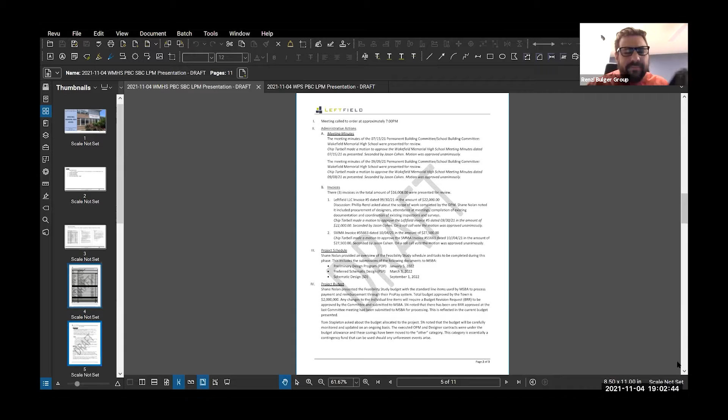I'll second. Any discussion? Who was the second, Michelle? It was Tim. Thanks, Tim. Any discussion? Hearing none, is there any objections to the minutes? All in favor? Minutes are approved unanimously. Thank you.

Second item is the schedule. Since the last time we met, we have reviewed the schedule and pushed it out a little bit. There was some concern about the PDP submitting it right after the holidays. It was January 5th was the day we were looking at. Given where we are with the visioning, the surveys and inspections in the existing building, and coming up to the holidays, Thanksgiving and Christmas, we were a little bit concerned about rushing the review of the different options.

Getting those out publicly and presenting them to the building committee. So we're looking to push the submission of the PDP about a month to January 27th. That will give us time to have a couple more public forums and also a couple more building committee meetings before we actually have to submit that to MSBA, end of January, early February. That will push the PSR.

I mentioned at the last meeting, the MSBA meets every other month, 6 times a year. So pushing that schedule out a month for PDP pushes out that whole cycle. We're now proposing to do the PSR early May and go to the MSBA Board of Directors meeting in June of 2022, pending approval of our preferred solution.

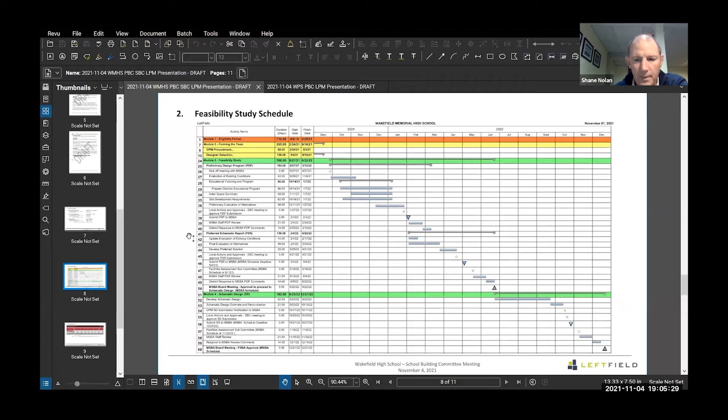So we've pushed the schedule out. I've attached the more detailed schedule here, which outlines the tasks during the different submissions to MSBA. But that's where we are right now.

Shane, do you need a vote on changing that schedule? I don't think we need a vote, Joe. I'll just notify MSBA — we have to submit a monthly report by the 12th of the month, every month. So I'll just notify them that we've pushed the cycle out from the October 22 board meeting for approval to the December meeting. Joe, if there's no objection, I think it would be good to take a vote, because sometimes MSBA asks if the SBC has voted on it.

Okay, so can I hear a motion to amend the schedule? Move to approve the revised schedule as presented. Is there a second? I'll second it. That was you, Tom, right? It's Mark. Mark, sorry. My first second. Yeah, there you go, I knew you'd make it, Mark.

All right, let's do a roll call. Janine, yes. Tim, yes. Phil, yes. I don't know, Chip, are you on yet? I didn't think so. John, yes. Tom, yes. Mark, yes. Did I miss anyone? Okay, it's unanimous. Thank you.

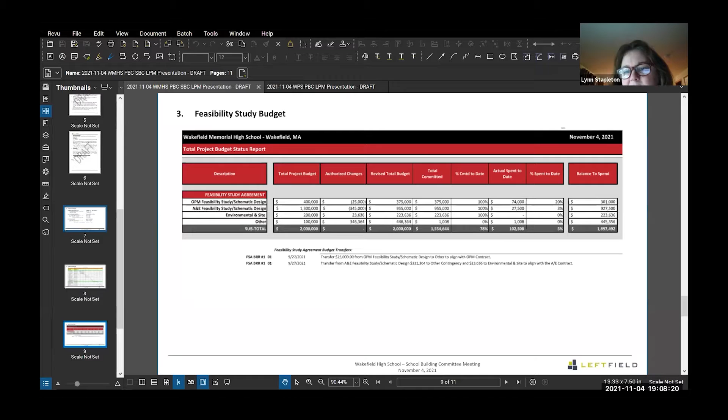At the time of the town meeting, we will have already submitted the schematic design and will already have had a budget established. At that point, we would probably also have met with MSBA to review that and be confident that going into the MSBA Board of Directors meeting, they would be satisfied with the budget we would be presenting. So theoretically, you could vote this at town meeting in November or by a special election in January, maybe.

Yeah, obviously something I think we should have some more discussion about, just to understand the implications of all of that and the timing for folks to be able to review the schematic design before we vote on it. Yep, absolutely. Thank you.

Any other discussion? Any other questions on the schedule?

Just an updated budget. There's been no changes to the budget since we last presented it. I've just updated it for the invoices that were approved last month. They show here in the actual spent to date column. We didn't submit a ProPay to MSBA last month, we were under 50,000, so we will after the next building committee and before the end of November, we'll submit another one. But there's been no changes to the budget line items, I've just updated it to show the invoices that have been approved.

Any questions on that?

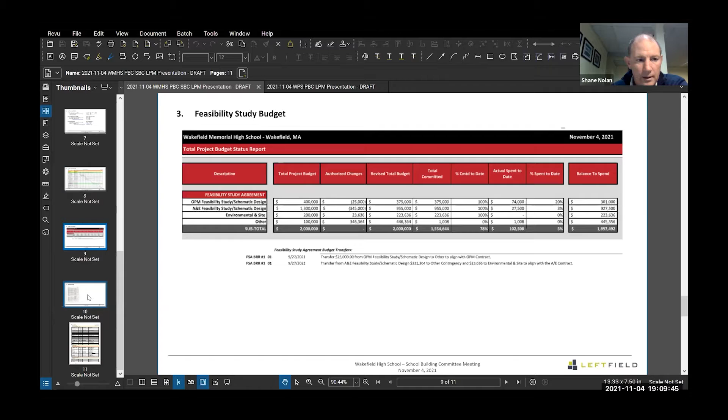And then just the next item. So we've been trying to tie some of the public meetings in with that schedule and the revisions. This is just an outline of the upcoming meetings during the PDP and the PSR, so people can put them on their calendars. We will confirm these as we get closer to the dates for the individual meetings. But this is what we're looking at for the PDP and the PSR.

So over the next month, we're here tonight for the building committee. We have a public forum next week where we're going to discuss the educational visioning. We've had 2 educational visioning meetings so far, we have 2 to go, so we'll update the public on the progress of those. Also going to talk a little bit about the existing conditions report, which we're going to talk about in a moment here tonight. We have our 3rd workshop, November 16th.

Next building committee meeting will be November 18th. And then the final educational visioning workshop will be November 30th. And we'll then update the public on that after that.

We have gotten a number of you who have submitted requests to be on the various focus groups. We're just going through that with the school administration, and we'll be finalizing those in the next week or so. So we'll notify people of which groups they're on if they've submitted requests to be on those groups.

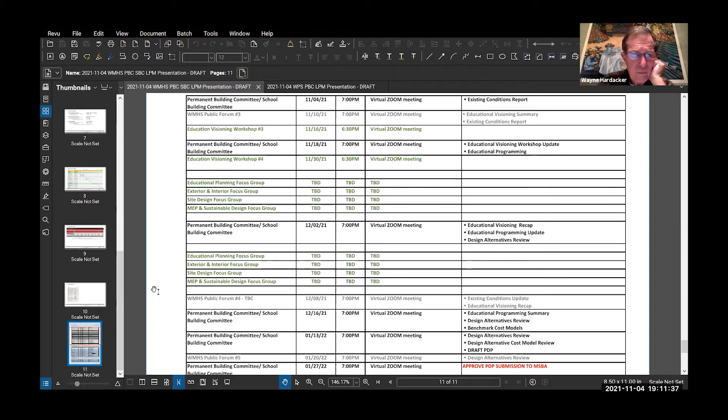Shane, it's Phil. Could you send this out as its own document, this spreadsheet with all these things on it? I will, yeah. It's updated regularly, Phil, but certainly I'll send it out. We'll confirm on the website, I put all these meetings on the website that we know, but certainly I can send this out to the group.

Any other questions? This is John. At the project Facebook page, some of these events aren't on there yet. I was just wondering if those will be updated on there. Is that kept up to date in line with the website as well?

Yeah, I'll have to coordinate that, John. I don't do the Facebook, I do the websites. Well, I'll make sure those are coordinated. But I would use the website as the kind of determining place to go.

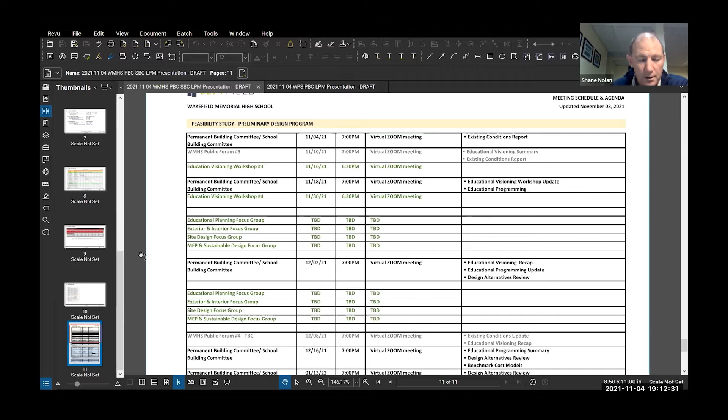The Wakefield Memorial High School Building Project Facebook page has the 4 educational visioning sessions included on there. And it also has the public forum noted on there as well.

Okay, yeah, I saw the November 10th one, I just didn't see anything after that. Right, I think what's happening is the town's website is also posting, the Facebook page is also posting, and that one, because they have more followers and whatnot, is getting the first one you see. But if you type in the Wakefield Memorial High School Building Project Facebook, it'll come up. Okay, gotcha, I'll take a look. Thanks.

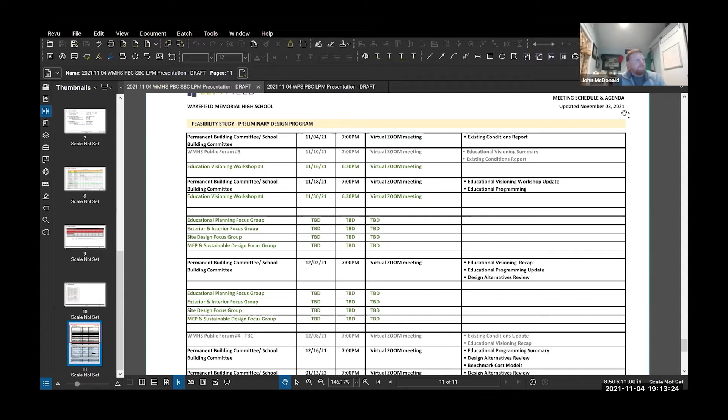Any other questions on the meeting schedule and agenda?

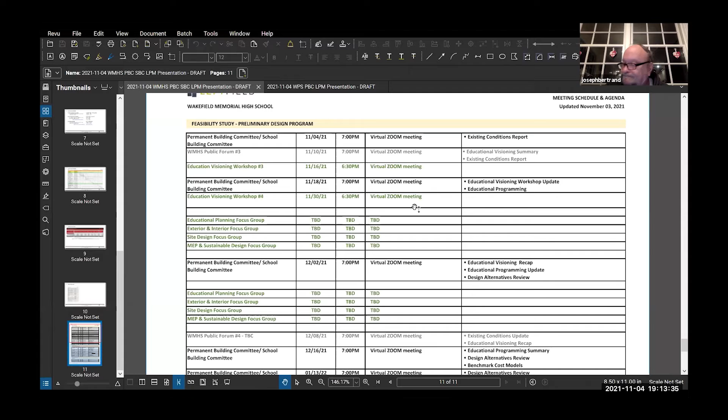All right, and that's all I had tonight. All right, Lorraine or Helen, who?

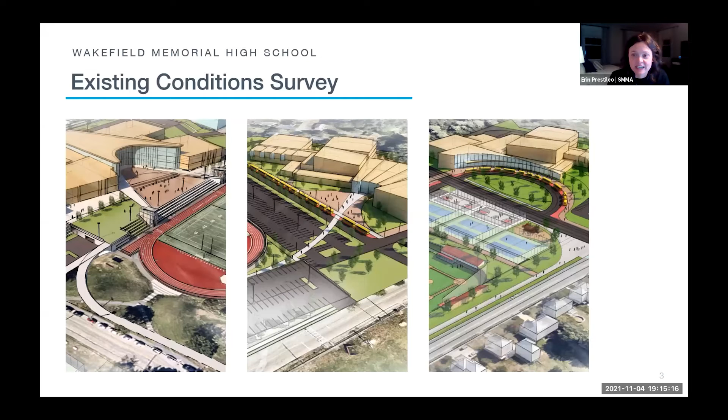Okay, so we'll start with site. The thing about site is that many of these things you are aware of because they're things that you can see, unlike things that are behind walls and below ground.

So the big takeaway here is that, first and foremost, the fields are in obviously great shape. They are very well maintained, so that is definitely a positive.

The condition of the one internal courtyard is fair. It's also the only space you have for outdoor learning, and we observed that because of that, there were actually some students and classes on the Beasley Oval. There's also an overall lack of pedestrian circulation.

So if you're in the building and trying to get to these great field spaces, you'll have to walk through parking lots, and that's something we're going to want to get into once we start to develop the site piece of all these different options.

We observed 4 school buses, but kind of an overall lack of on-site parking. The parking seemed inadequate, and again, that's something we want to be aware of as we move forward with designs. The loading dock was also inadequate and in poor condition.

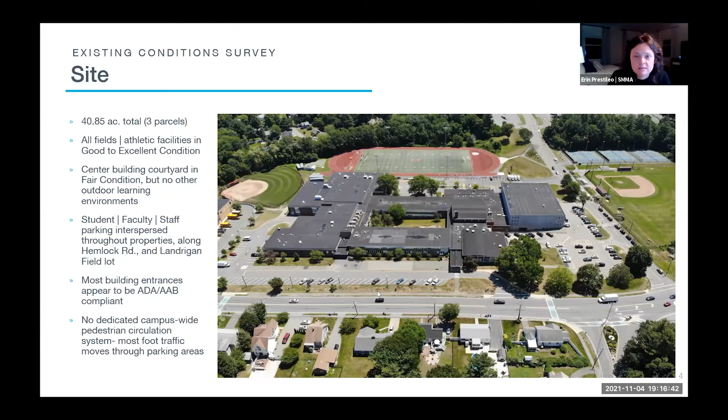I'm sorry, Matt, we have some photos of these on the next slide that show some of these. Again, these are all things that you see, so you may be well aware of some of these items.

If you go to the next slide, I just wanted to speak briefly about some of our work with our consultants. Our site survey will begin field work next week. Geo-environmental, traffic, and wetlands studies are all underway.

We did complete 17 geoprobes last week, completed between 1 and 15 feet. They identified different types of soil material: topsoil, sand, some buried organics, and fill. About half of them hit rock, and we don't know if that's bedrock or a cobble or a boulder, but that's what we have so far.

And that's it for site.

So I'm Ben Williams. I'm speaking for our structural engineer on the project, Paul Levinoy, tonight, as he wasn't able to join us. In terms of the structure, he observed during his walkthroughs that the structural systems throughout the school are broken up into mainly 2 different categories, or 2 different vintages rather.

Exterior wall systems consist of composite masonry walls, face brick masonry back or CMU backup, all grouted solid. Generally, those also have a very low ability to maintain heat inside the building. Typical buildings are significantly much higher. We are suggesting that we've looked at this and think it's about an R4. Typical buildings nowadays can be between probably about R25 to R30 or even higher, depending on the sustainable goals.

There are few exterior expansion joints throughout the building, which lends itself towards movement and cracks, especially at the corners, especially where the 1970s and 60s buildings meet. Throughout, it's common to see sealant joints failing, where you have brick meeting windows, sills at windows, things like that. At louvers, consistently also showing sealant failures.

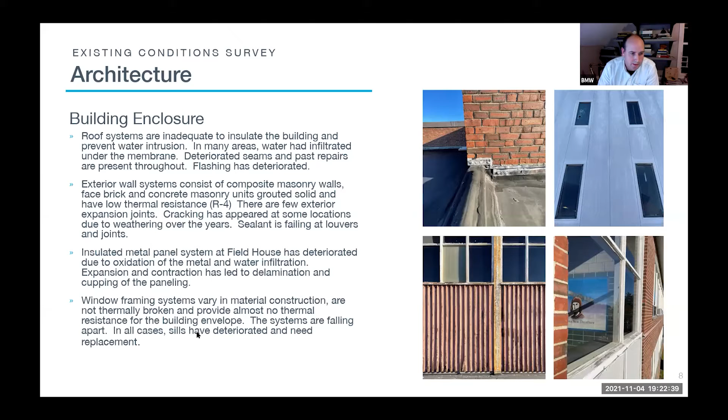At the field house, we've seen 2-inch insulated metal panel systems. The panel systems themselves had a coating over time that has deteriorated, oxidized the metal, starting to expand and contract and delaminate those panels in their ability to keep out water and also maintain temperature in that space. Window framing varies in material construction. None of them are thermally broken. They all have single pane glass and again show signs of sills deteriorating.

Safety and egress is something we've been paying attention to. Classrooms and corridors aren't adequately separated with fire rated walls. Spaces responsible for discharging people safely are allowing for the transfer of fire and smoke and not providing enough compartmentalization. Doors are held open with wedges, whereas they probably want to be connected to a fire alarm system through a system of magnetic hold-opens that would close in the case of a fire.

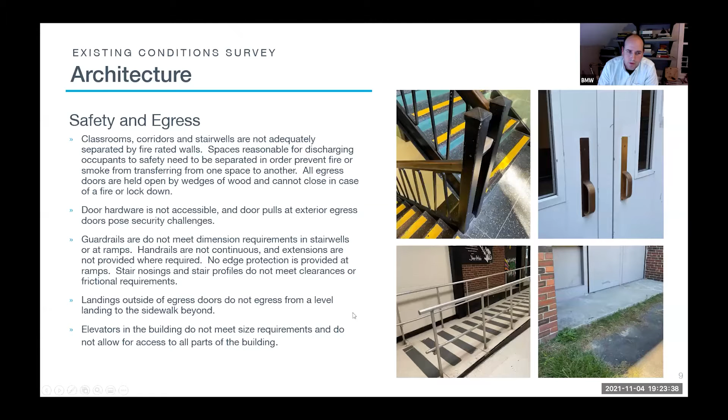Door hardware throughout is not accessible. Door pulls at exterior egress doors create some security challenges in general. Stairs, guardrails, and handrails don't necessarily meet dimensional expectations and so forth. Landings and elevators all need to be looked at a little bit further.

General education spaces are composed of masonry partitions, spline ceilings, and flooring made of hazardous material. The 1970s building features similar construction - masonry, ceiling tiles, and hard flooring. A lot of the spaces were designed to be open, but had later been partitioned off, creating spaces that are poor acoustically. Likewise, spaces that had operable partitions are not being used as they were originally intended.

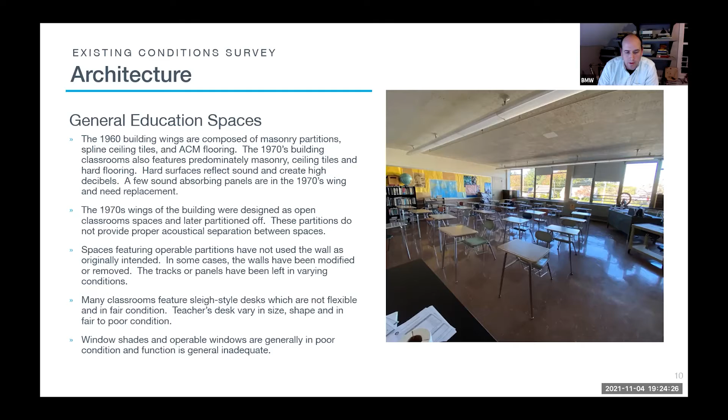Furniture doesn't quite meet the goals of modern learning, and window shades and operable windows are not functional. Bathrooms, locker rooms, and so forth are falling short in that the toilet fixtures and accessories inside aren't within accessible reach and don't necessarily meet the space requirements needed to access those fixtures. Locker rooms in the field house are also generally in poor condition, as is true for the showers.

Guess that hands it over to me.

Many of the things you probably know about already, but the building consists of two independent secondary services: one from the original 1960s, and one from the 1970s. Both are original to the building, which is very common in this kind of construction.

All the equipment is what we call Federal Pacific, a manufacturer very common around that time, but no longer in business. You just can't find parts, circuit breakers, things like that. So it's operating, but it's really not operable for the long term.

Similarly, there are two generator systems for the buildings, again from the 1960s and 1970s. Both generators are operating, but the systems are non-compliant to today's standards in that you have to separate emergency, legally required, and optional standby systems. Aside from the head end generator being old, the distribution from that generator system is non-compliant either. You would have to have separate transfer switches for emergency, separate for optional standby, which is like kitchen equipment, versus emergency lighting.

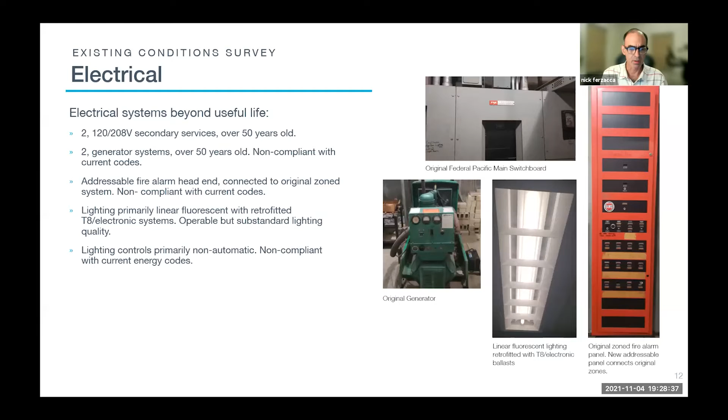There's a whole series of auxiliary systems - public address, master clocks, and so forth - which are all original to the building. I didn't write about those as well, but the summary is really that most of these electrical systems are pretty original to the building.

And yeah. Thank you, Nick.

And again, my name is Matt Rice. I am an architect, but I'm going to run through the HVAC systems and the plumbing systems for our engineers that walked through and did the survey.

The short story here, obviously, is that most of the HVAC equipment has exceeded its life expectancy. That's to be expected from a 1960 and 1972 construction, given the equipment we're dealing with. This includes the boilers, boiler room, including the steam and hot water distribution piping in many of the crawl spaces that exist. There's a series of underground tanks for fuel oil located just outside the loading area, something to be investigated and dealt with on the site side of things.

Many of the chillers fall into that category of having outlived their useful life. We know there is a very new chiller that was put in recently for the cafeteria, and while it's in good condition, it's still sort of the minority in terms of the overall equipment within the building.

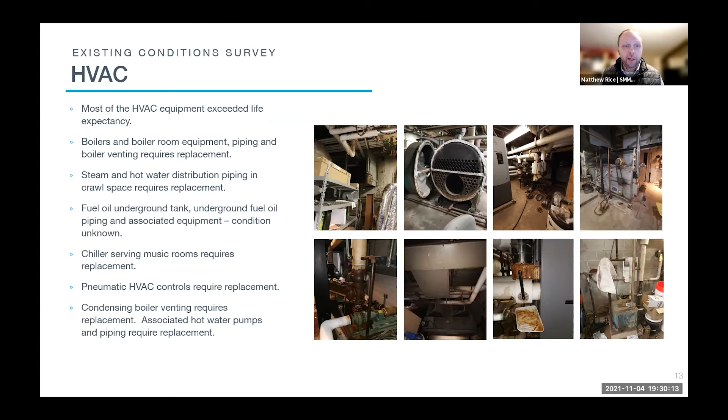There's older pneumatic HVAC controls that are just outdated at this point. As well, the condensing boilers, which are newer in terms of boiler equipment, their venting has already started to rust and deteriorate a bit. So that would need to be replaced, as well as the hot water pumps and piping associated with that. Again, the chillers I mentioned - their operation would need to be verified in terms of making sure they're achieving what they are designed for.

Their pumps on the cold water side and chilled water side need replacement. Unit ventilators that provide ventilation to the classroom spaces and primary learning environments, and their piping, require replacement. Fin tube radiation, cabinet unit heaters, the air systems, ductwork, and associated components serving cafeterias all require replacement, as does rooftop equipment in that same category, as well as the roof exhaust fans.

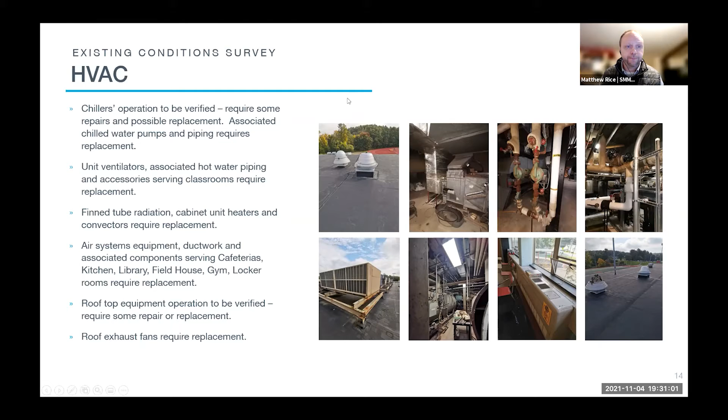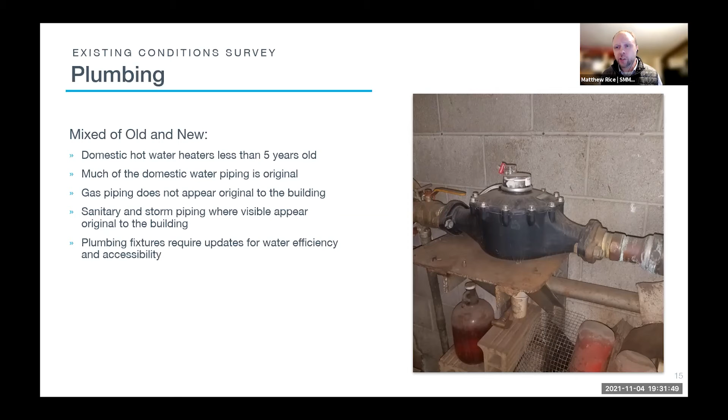On the plumbing side, a very similar story. Most of the system and distribution is of original vintage, and so, as expected, has outlived its useful life. The exception would be the domestic water heaters, which are less than 5 years old, but the piping feeding those heaters is original. Gas piping, some of which was installed to feed one of those generators that was converted from oil to gas at a certain point, and the sanitary and storm piping are also original at this point. And as Ben noted, the plumbing fixtures, both in terms of water efficiency and accessibility, are in need of replacement.

And lastly, the fire protection system, installed in 1975, is of good vintage at this point, close to 50 years old. There are 3 different fire water services coming into the building, so that's something we'd look to make more efficient and centralized as part of any renovation project, even bringing it up to code. A new sprinkler system that is fully code compliant would be required in any scenario.

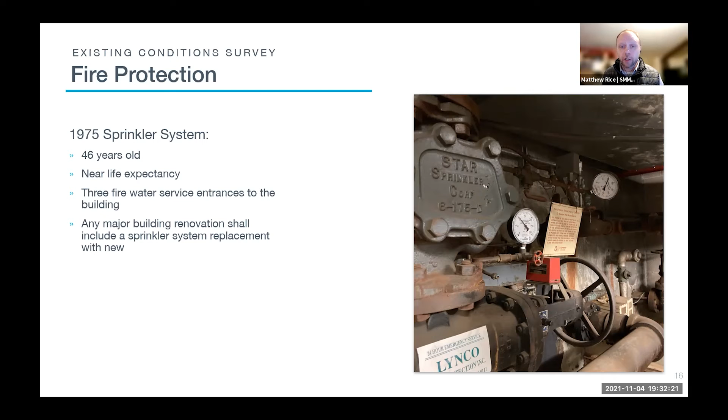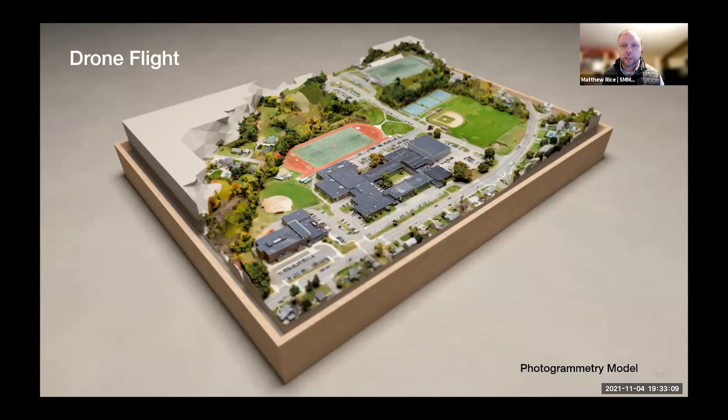Lastly, I wanted to close with another bit of the site exploration we've been doing over the past couple of weeks. Some people may have seen our drone operator out on site, getting valuable digital information for us to work with. This image bridges the fine line between a physical model and digital reality - it's what we call a photogrammetry model. The drone flies through and creates a photorealistic digital model that we can work with as we create design studies for the project going forward, to share with the community, leveraging additional insight into the overall site.

I think we went through the schedule already, so I don't think there's anything else we need to say here. That was the extent of what we wanted to cover with you.

Not sure if we want to pause for any questions or keep moving. I had one. Helen? Yep.

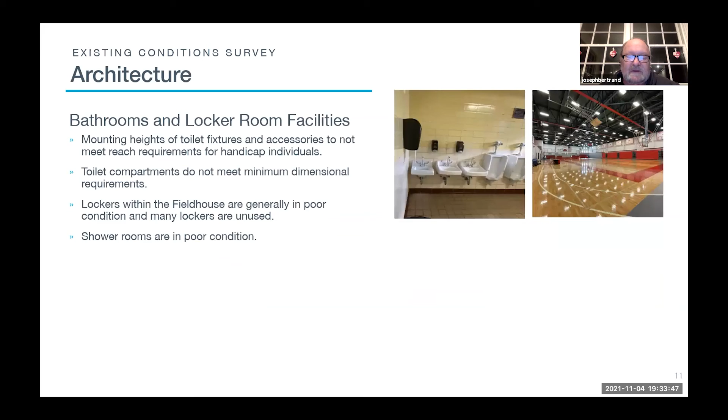So to follow up on Joe's question, if you build a new building to the right of Hemlock Road on the baseball field, would you expect to do more boring? Yes, if that's the direction we're going, we will complete additional soil borings during schematic design. You should know there's a river that flows under that field. I have heard, yep. So I don't think 4 is what we need. Yes, a river runs through it.

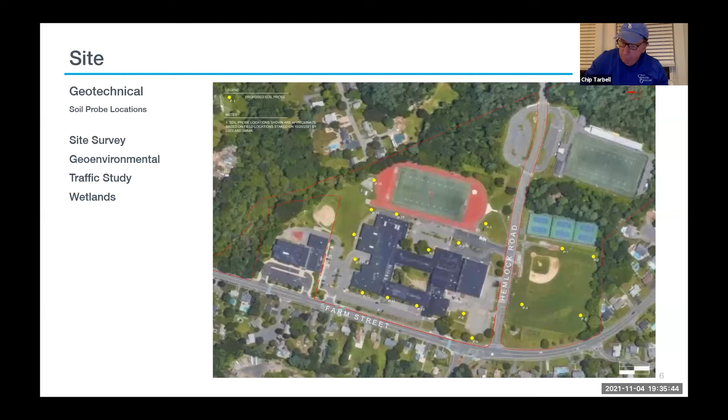And the other question I had was on the structural side of things. I know when we had a structural survey done a few years ago, they mentioned that the 1960s building couldn't be brought up to seismic codes of today, and I didn't hear any of that being mentioned.

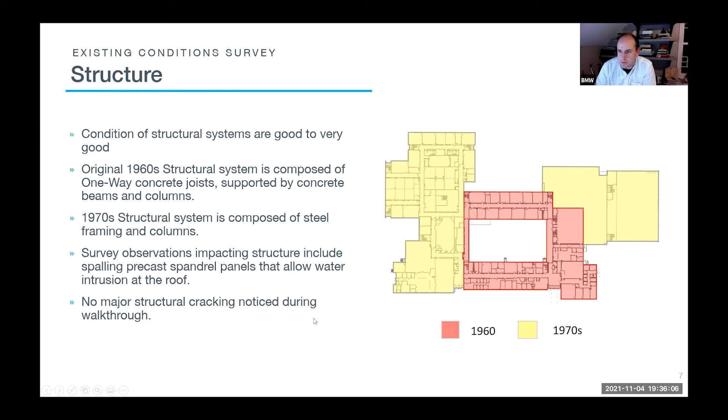So our opinion is that we think it's in good to very good condition. As for the masonry walls, one of the things we'll be paying greater attention to is making sure they are clipped back to structure, because in some cases they are not. In case of seismic, for example, they need to be braced, and that's an example of a measure that would need to be taken.

Just to add on, that's for the masonry walls, but the structural system itself would need to be structurally braced, depending upon the level of renovation as defined by code. It's not that it can't be done, but it will reduce square footage because you'll have to add in brace frames. We did this to the concrete frame building in Winchester, so it can be done, but it's more expensive than a traditional steel frame system and it does eat away at square footage. That's a consideration that has to be taken into account.

I was just concerned that we're saying the structural system is good to very good, yet it doesn't meet any of the current day seismic codes. So it's good to very good for its existing condition, but we're not saying what happens to it when we start touching it.

Can I ask a structural question? What percentage of the structure do you look at to be able to define if it's good to very good? It's a pretty big, vast structure, so how much did you look at to come to that conclusion?

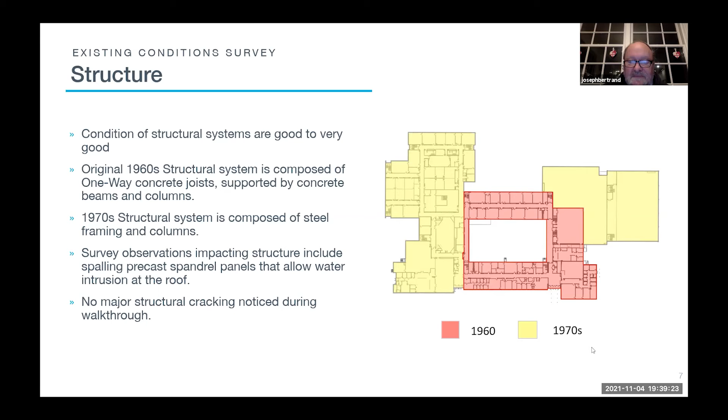Are there any other questions regarding the existing condition survey? Nope. Okay.

Thank you very much. Is there anything else, Shane? For the high school? No, I don't have anything, Joe. Lorraine or Helen, anything else? No, thank you. Good questions, group. Keep us on our toes. Well, we try. We haven't even started yet. Well, he hasn't. All right, good night, thank you everybody. All right, good night, thank you.

That concludes the portion on the high school. They did more surveys and will report more on them in 2 weeks.

Shane, you want to go to the public safety building? Yep. So just a quick update on the public safety building. We'll look at the meeting minutes from the previous one, take a look at the updated budget, and then talk a bit about the subcontractor bids and preparation for town meeting this weekend.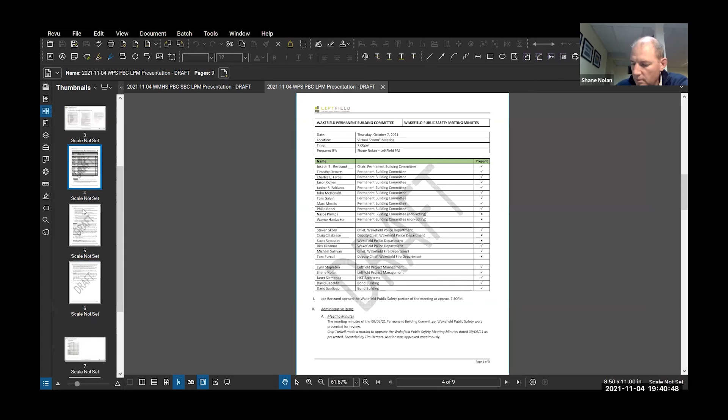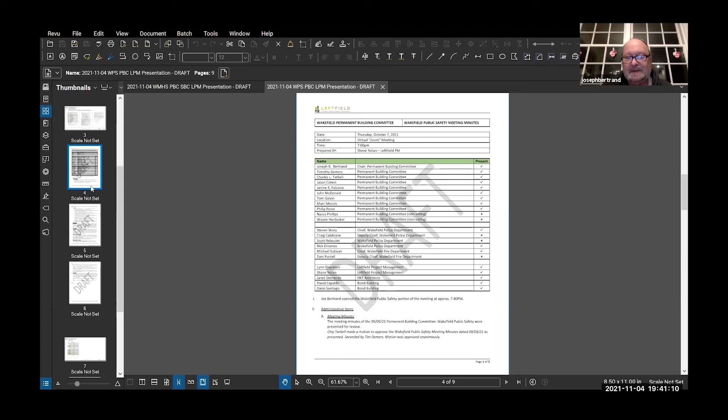Meeting minutes were distributed for review. Do I hear a motion? I move to approve the October 7th meeting minutes. Is there a second? Second. Any discussion? Hearing no discussion, is there any objection to the minutes being approved? Hearing none, they're approved unanimously.

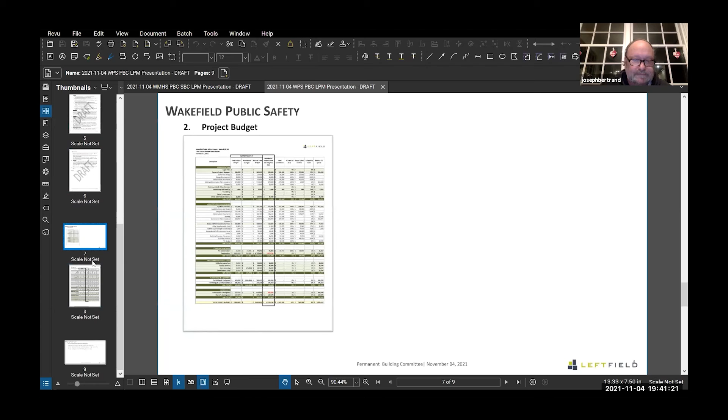Just an update on the budget. This is what we presented last month. There's been no changes other than updating the invoices that were approved at the last building committee meeting. So no changes to the project budget since our last meeting.

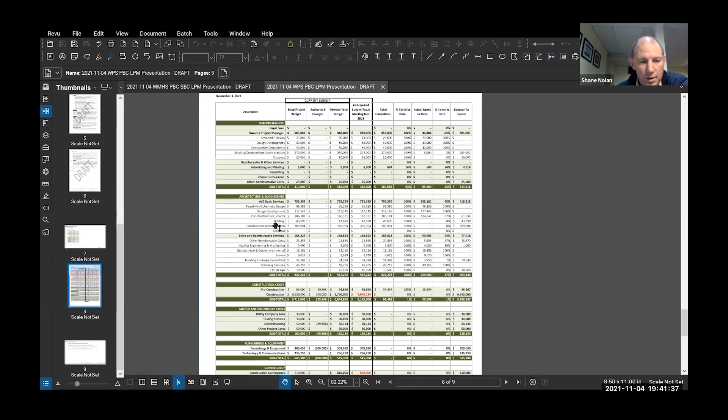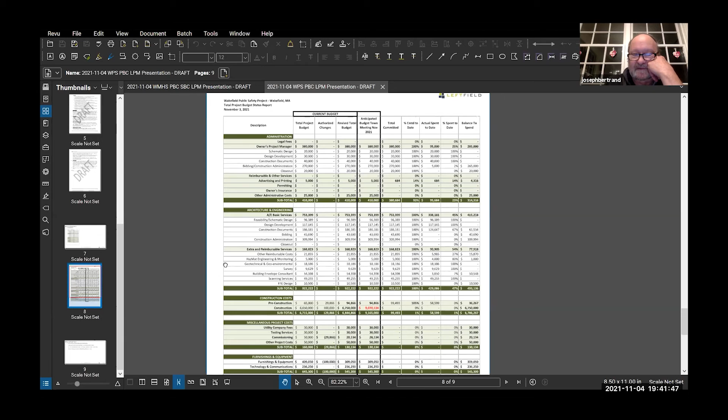No comments or questions. Are there any questions on the budget? Hopefully that will be increased. Yeah.

So last topic tonight: the review of the subcontractor bids and prep for town meeting on Saturday. We sent the bid documents to the printers and the trade contractors.

We've talked a little bit about the difference between a trade subcontractor and a non-trade subcontractor. Trade subcontractors are required to pre-qualify through a subcommittee. We did that and presented it last month. We approved that list, and those contractors were allowed to pick up the bids.

They submitted their bids on Wednesday of this week through a public procurement process. We're reviewing those bids right now and plugging those into the overall numbers. We're still tallying those.

There's a lot of work to do. After we get those, we have to look at the bid and make sure they've submitted the correct documentation, their certificate of eligibility to bid on public work, a document called an update statement. They have to submit a bid bond and some other forms and affidavits. So we're going through all of those to make sure the bids are legitimate and can be accepted.

At the same time, there's non-trade subcontract bids. These are the bids that Bond goes out and procures directly. Bond sent those to their subcontractors at the same time we sent ours to the trade subcontractors. They've been coming in, but unfortunately with the non-trade it's a little harder.